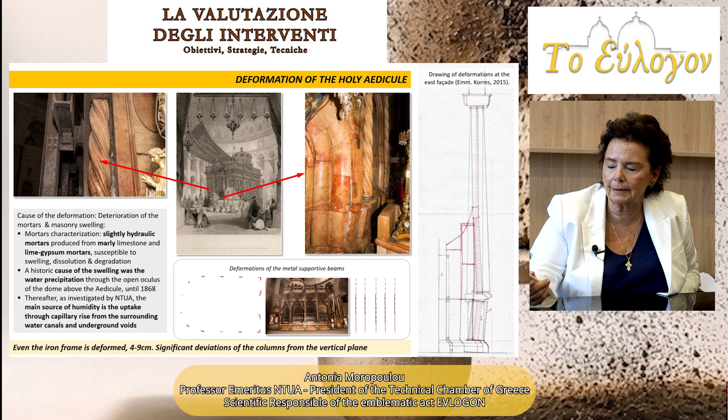All the data on materials, structures, and geometric representation were composed into a finite element model for structural documentation, and they became input to the proposal for rehabilitation, which became feasible after common agreement on the status quo, after two centuries, to go on with the project.

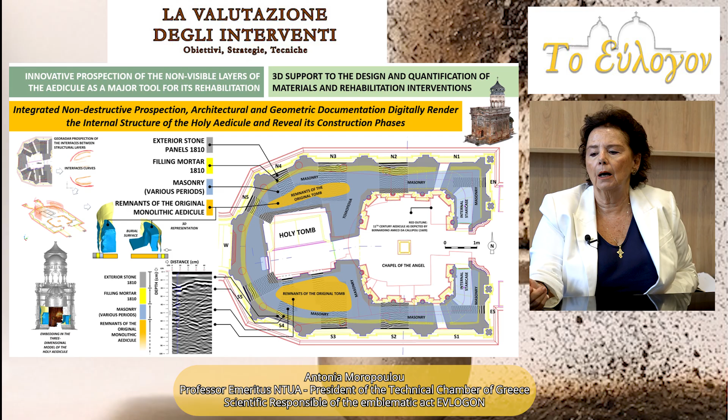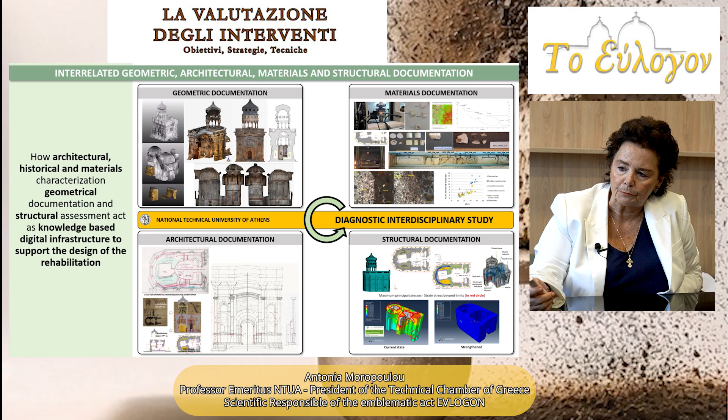Within the project, the main issue, always with respect to decision-making by the Christian communities in a very challenging environment, was that scientific support became the major task for decision-making. That's why quality control in the implementation methodology, with integrated governance of the project, became the utmost tool for assuring compatible and performing materials were used, and that through the iterative process of the main stages of the rehabilitation, all interventions served the goals of the project.

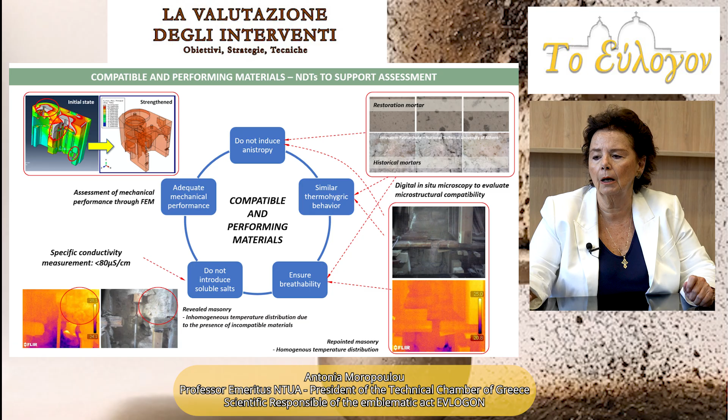Upon completion, we can ask: were these aims achieved? Assuring structural integrity, we had to register the time evolution of the column's deviation from verticality using a general geodetic station, and at the same time record a multi-layered finite element model which would assure that the response of the retrofitted structure was validated and capable of addressing the earthquake history of the area.

Revealing and preserving values, from the archetype material of the burial monument to the marble bearers and to the Tomb of Christ itself, were the major tasks for us.

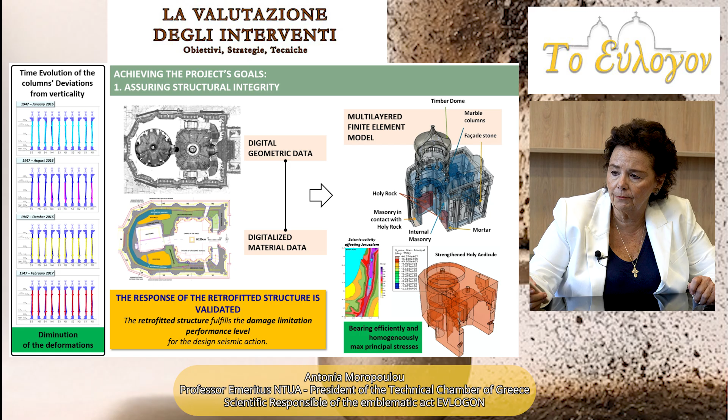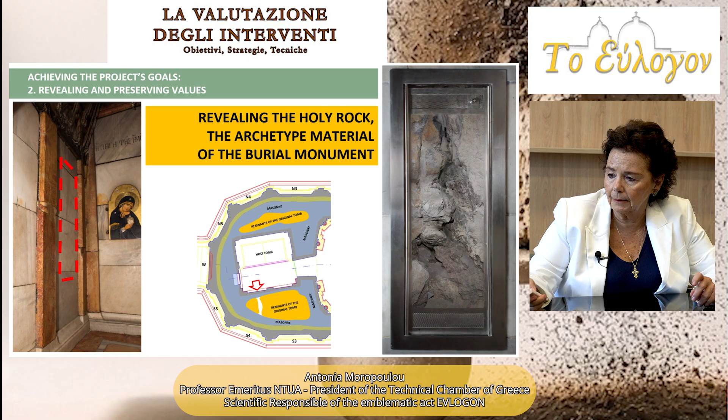When we opened the Tomb of Christ after many centuries, it was a very specific experience of quality control to reveal its values through archaeometric luminescence dating methodologies, which investigated various historic periods on the tomb, and through metagenomics and bioinformatics concerning the microbiota characterization of building materials of high historical and archaeological significance, cross-linked with the archaeometric results.

In the end, the non-destructive prospection techniques of the Tomb of Christ revealed many aspects of its morphology.

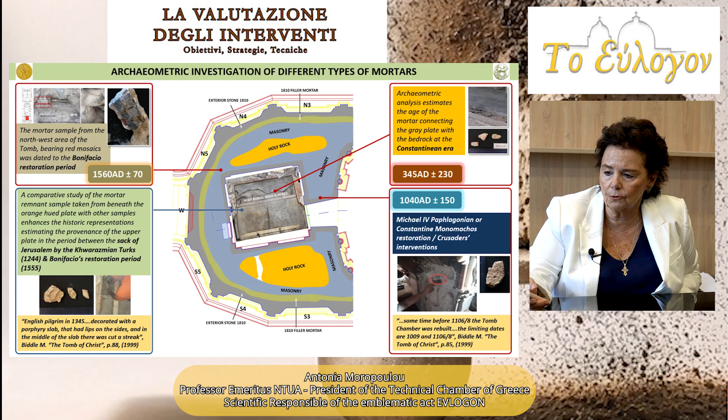The overall sustainability of the rehabilitated Holy Aedicule in the environment of the Church of Holy Sepulchre was a major issue, and infrared thermography testified intense rising damp phenomena.

Hence, we had to document by 3D digital non-destructive prospection the underground tunnels representing all the risks of underground water, and at the same time the geometric documentation was the common background to manage all this data, which permitted us to present the study for a peripheral drainage and ventilation gallery to support the rotunda and to facilitate drainage and ventilation systems of underground perimeter corridor and installation of new sewage and rainwater networks.

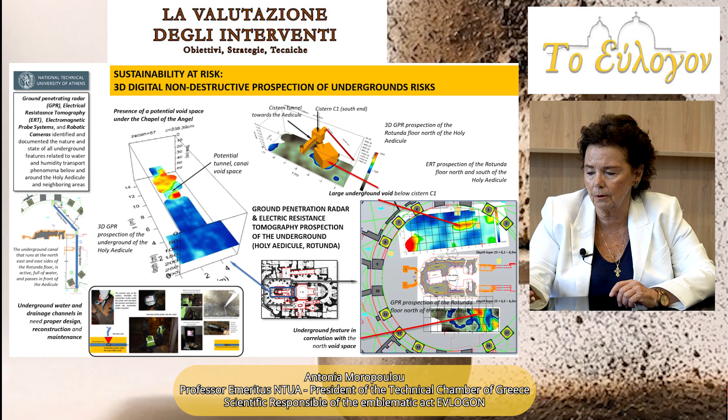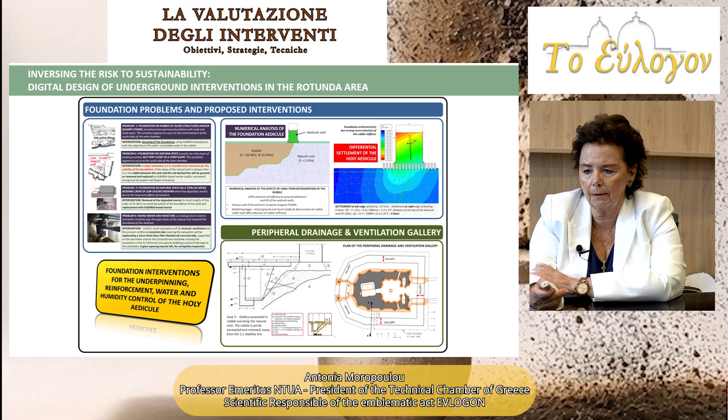This was a pre-requirement for the future work, which is now undergoing in progress. Remote data acquisition for a multimodal performance health monitoring was the third stage, after rehabilitation, which, however, did not have a duration for more than 6 months.

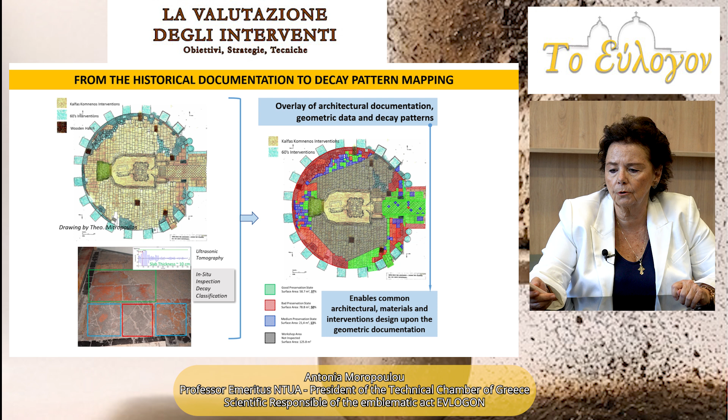In a few words, quality control implementation at the Holy Aedicule in all the phases before, during, and after was considering the certain processes of quality control that I presented, and has proved actually that quality control is feasible and gives valuable results.

In the case of preservation and revealing of the Hagia Sophia Byzantine structure of Justinian within the protocol agreement of '94 between Princeton, NTUA, Bogazici, and Kandili Observatory, we had the experience of working through the characterization of historic materials and their plasticity to earthquake risks, and the response recording of Hagia Sophia in certain earthquake risks.

To actually organize by a finite element model the future intervention with compatible and performing materials, which was accomplished by June '99, in concerning compatible restoration mortars.

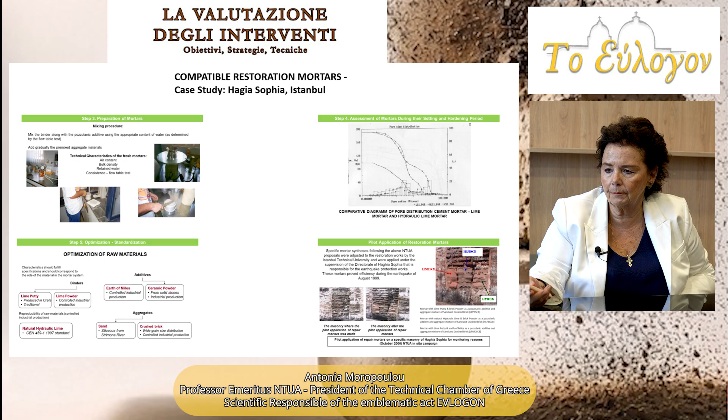The Hagia Sophia finite element model, a dynamic analysis of this data validated even in the lab, and the static analysis, the non-linear after application of simulated earthquakes, and the pilot application of the restoration mortars permitted...

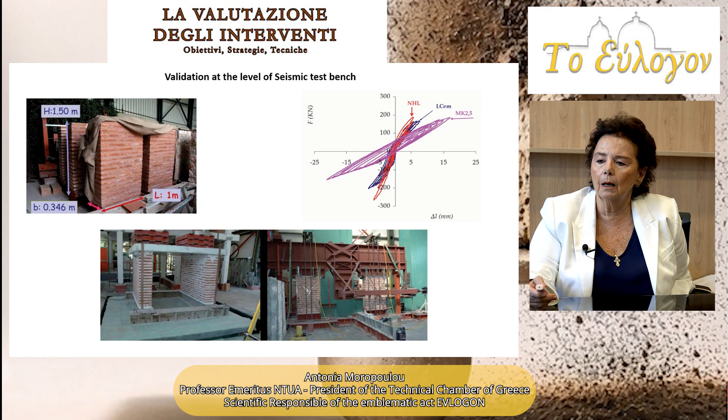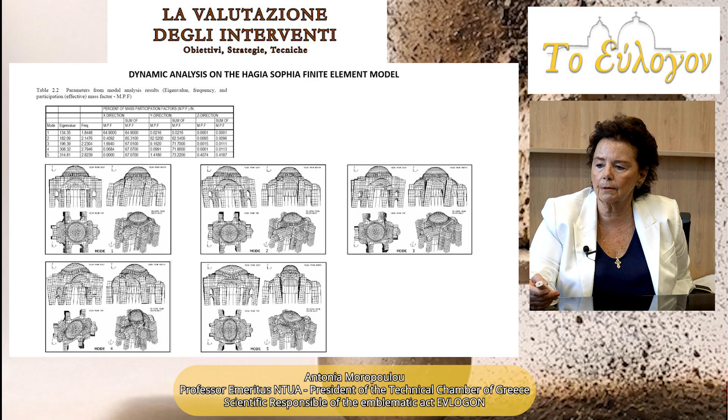After the big earthquake of 7.4 Richter of Istanbul that nature has presented, Hagia Sophia was shaken but not stirred. And the achievements of the project are important for a valuable quality control concerning earthquake protection of emblematic monuments.

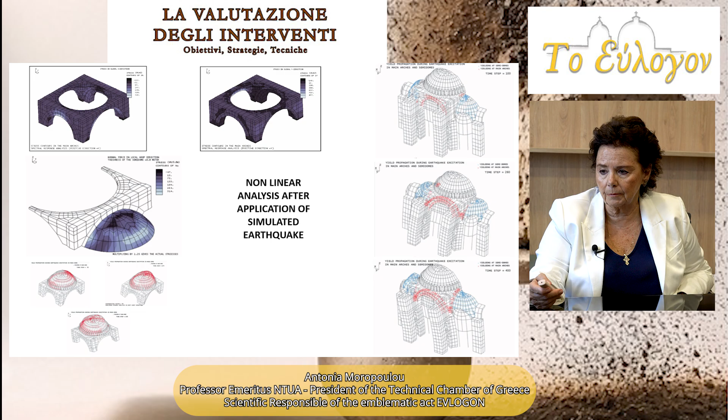In the case of the Holy Monastery of Varnakova, which is a major post-Byzantine monument in central Greece, which was actually a focal point for the national liberation struggles of 1821, it was an effort by the same team of NTUA to apply the interdisciplinary methodology that we used at the Holy Sepulchre.

And from that point of view, the 3D scanning and the stages of interventions with compatible materials and rehabilitation interventions were monitored continuously for the quality control of the interventions with the same methodology before, during, and after the performance of the work.

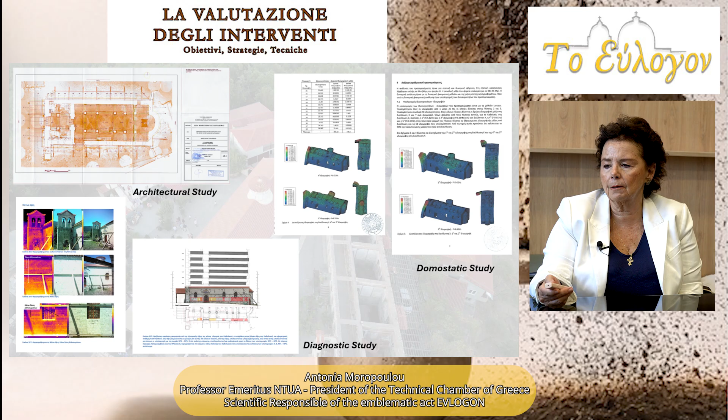Through the quality control methodological framework applied in Evlogon in these different case studies, we might discern the quality control objectives, methodology, tools, and control parameters, let's say, for structural integrity, for materials compatibility, for interventions performance, for decay and risk diagnosis, and for long-term sustainability.

Although each monument presented different challenges, the same quality control workflow was applied: documentation, diagnosis, intervention, validation, and long-term performance assessment.

From Evlogon methodology to quality control standardization, we are working now at the Technical Chamber of Greece, all Greek engineers and architects, and within the national network, we are going from methodology to standardization.

As we say, through guidelines and technical instructions that permit all these procedures of diagnosis, quality control during the works, and for a continuous monitoring afterwards, that we will be describing through these guidelines all the required documentations, interventions, assessments, and sustainability criteria.